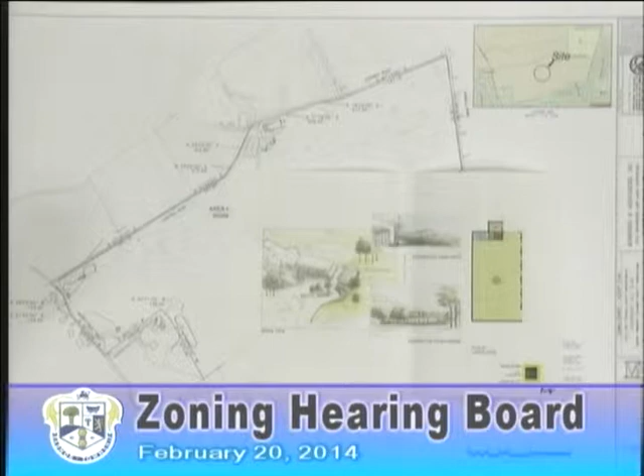David Fiorello. I'm a professional engineer with the firm of Momini Associates in Bryn Mawr.

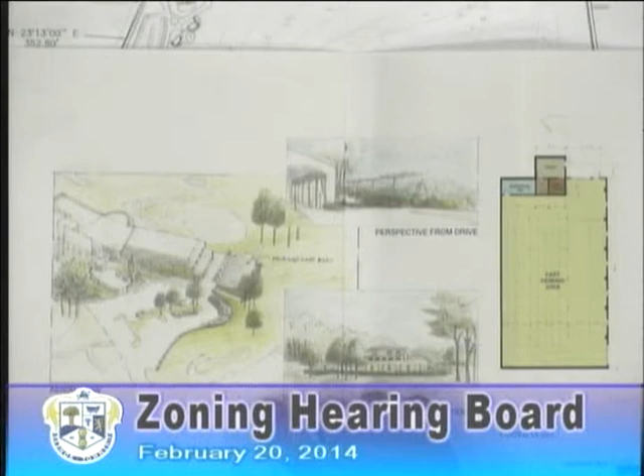You can see, looking at the aerial view to the left here, the existing clubhouse building. There is a driveway in between that serves the current golf cart area. This is where the members come out and pick up their carts. The area where the building is shown is where the current golf cart parking area is.

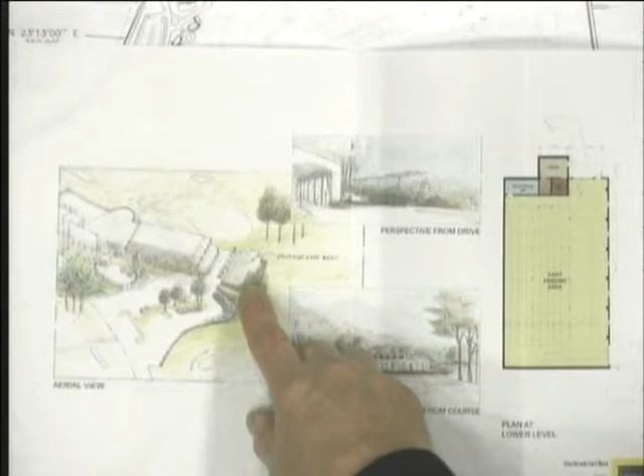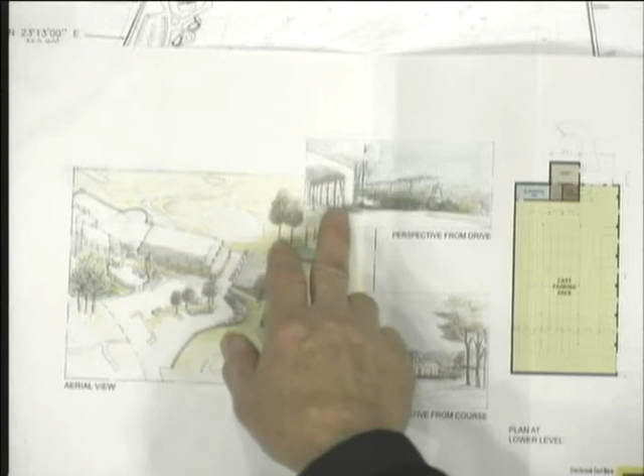The perspective from the course is looking up towards the clubhouse and the building. The perspective from the drive is as someone is coming into the parking lot and looking down, you can see the portion of the clubhouse facilities and the porch on the left and the new building to the right. The building will be lowered into the grade so that passersby will be able to look over the top of the building.

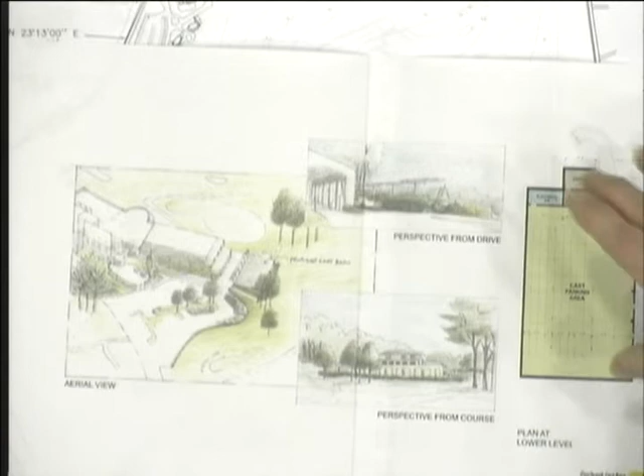The floor plan, as it's shown here, the cart parking area is oriented so that the clubhouse is to the left.

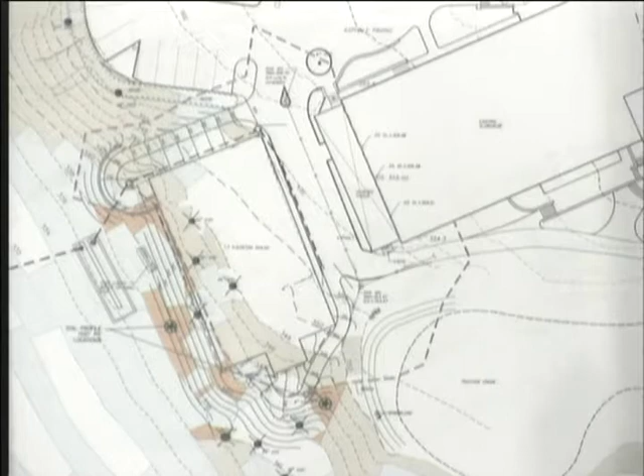I can go to the plan showing the layout, which shows the intent is to have the building oriented this way, so that this ramp coming down will be a ramp leaving the building to bring the golf carts up to this areaway. That is this driveway here.

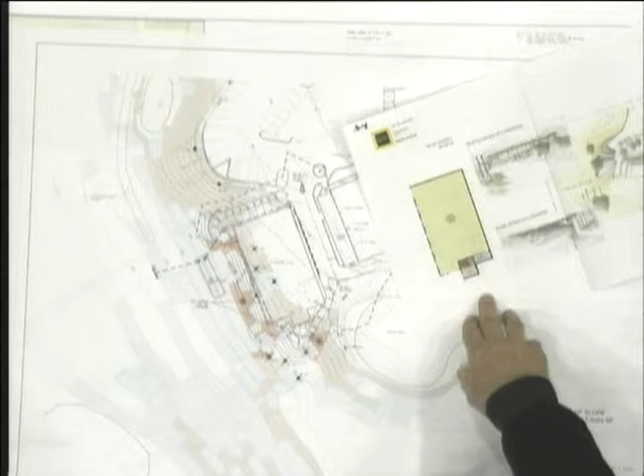There is a ramp that will return the carts back to the building down through here. It goes along the side of the practice green. That is the driveway coming down to this lower portion of the plan, and there's a side door that goes into the building in that respect.

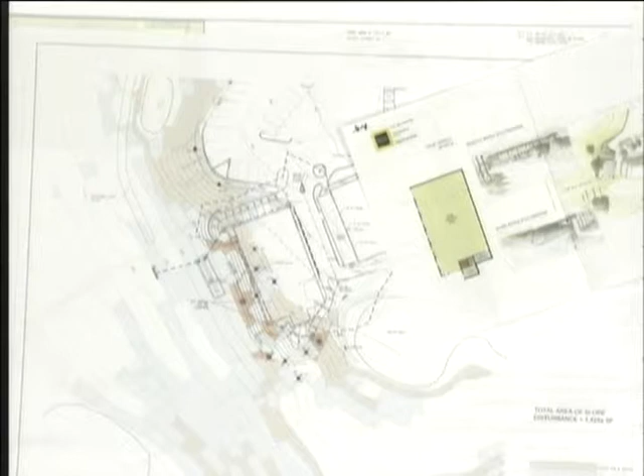Can you please state for the board your occupation? I'm a home builder. And what is your association with the club? I've been a golf member there for 25 years. I've served on the board a couple consecutive terms in the past. I'm currently a member of the Facilities Committee.

We've already touched on this, but can you please describe the proposed project for which we're seeking the zoning relief, and also describe the reason for why we need the building? Okay. When you drive up the driveway to the property, there's a parking lot here, which is to the right of the driveway, before the main clubhouse, which is over here. This is the golf porch and the golf shop where everyone starts their round and everyone finishes.

There's a paved driveway in here which is exclusively for golf carts. This parking lot is for automobiles. This driveway is for golf carts, and this current parking lot is for golf carts. You start your round here, and you finish here. So this is the central starting and stopping point for golfers. As David has already described, the building is set down into the slope where the parking lot is, so that when you're on this porch, you can still look out over the top and see the golf course beyond.

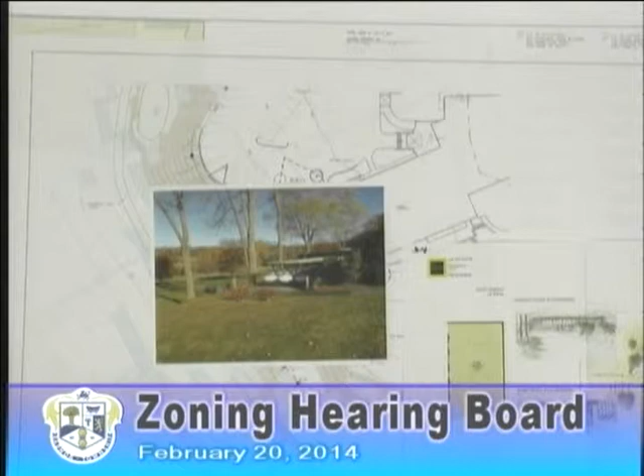And were any other locations considered for this building? Yes, we did look at a couple of remote locations.

Okay, this is Godfrey Road, and here's the main driveway into the club. There's a maintenance building right at the entrance, which is a brick building in the same architectural style as the clubhouse, and there's an employee parking lot here. We looked at that location, but it doesn't make much sense logistically because we start the carts at the golf porch and finish at the golf porch. If we put it down here, we'd be shuttling these things back and forth up and down our driveway all day long.

Another advantage to locating it here is we're putting it in a location that's currently macadam. If we put it down there instead, we're not in a position to remove our employee parking spaces for cars, so we'd have to find a spot where we'd be starting from scratch. Plus, we have close neighbors right across the street, actually two, so that didn't make sense either, but the logistics are the main reason we want it here. It's already shown on the perspective we reviewed with the board, but can you describe the proposed architecture of the storage building? Yes.

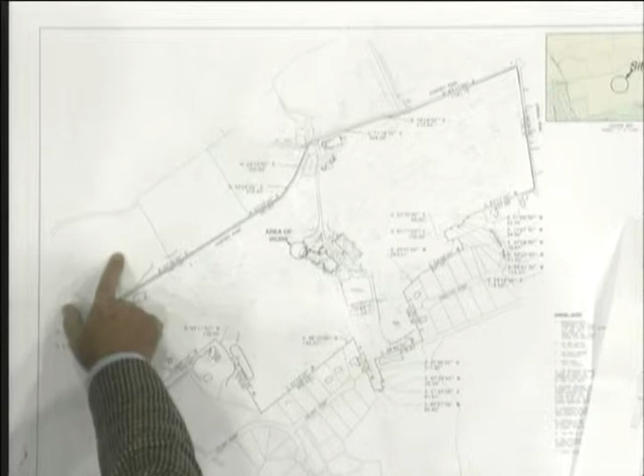There is a house on this property, probably another 400 feet from Godfrey Road, so this building would be visible from that house. Actually, there are a total of 3 houses here, near Godfrey and Darby Paoli Road. There's one house I don't believe would be visible, another on this large Ardrossan lot, and one more on this lot. So there are 2 houses across the street that could visibly see this, but this building is 450 feet from Godfrey Road, plus their setbacks are a couple hundred feet.

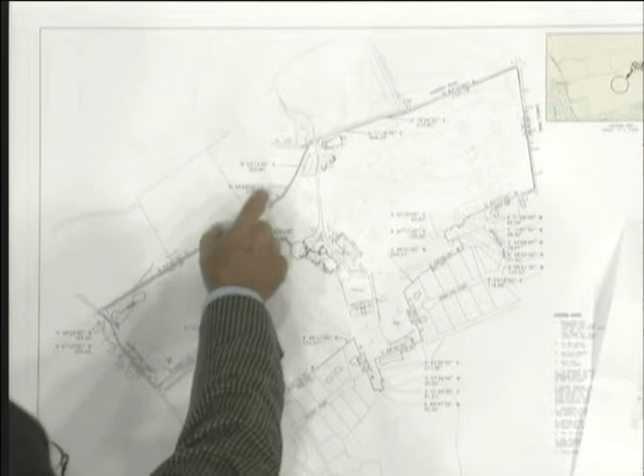Is this building going to be open on the sides, or is it fully enclosed? No, because it's half buried, it's sort of like a subterranean basement bunker. But it looked in the rendering like you could see the sky through the side, so it looks like they were all open.

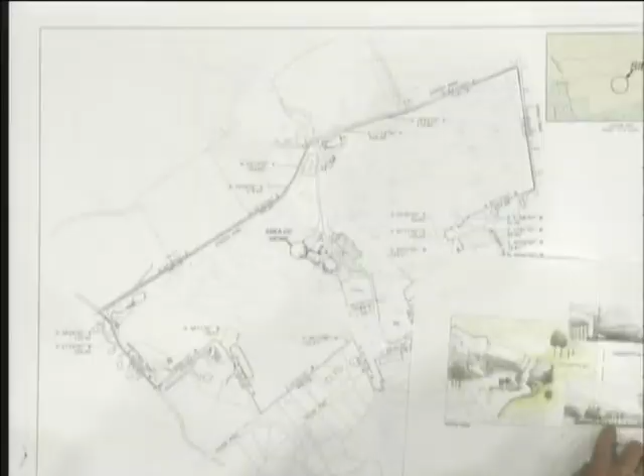Okay, when you look at that upper right-hand area, where I have my fingers, is that what we're looking at here? Or do you mean this? I see what you're doing. Are you referring to this? Yes, in that one there, it looks as though you can see through the blue sky, so it looked like it's an open side.

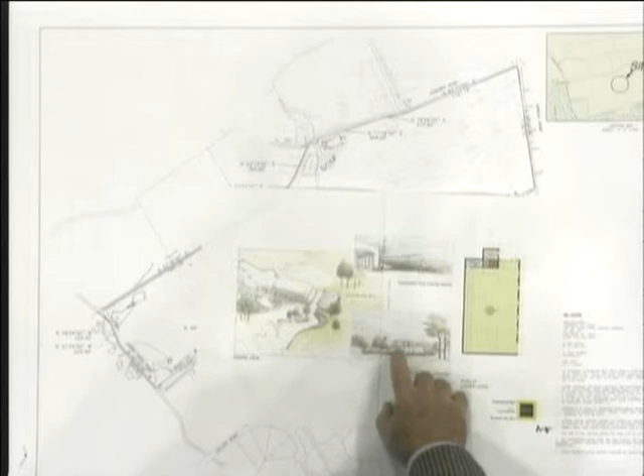Oh, that's the clubhouse beyond, with the dark circles in the middle with the arches. So the roof is kind of the grade? Exactly. The roof is similar to the grade where the golf porch is.

Now, this perspective from the course, that thing there, is that the side of the new building we're seeing with those arches? Yes, that is correct, that's the new building. I see, because presumably the course is all around it, so I didn't know which perspective this was from. That's correct.

Sorry, I'm so thick. What's the structure that's there right now? There is no structure at all, just a paved parking lot, open lot. So the golf carts are visible from those properties? Yes.

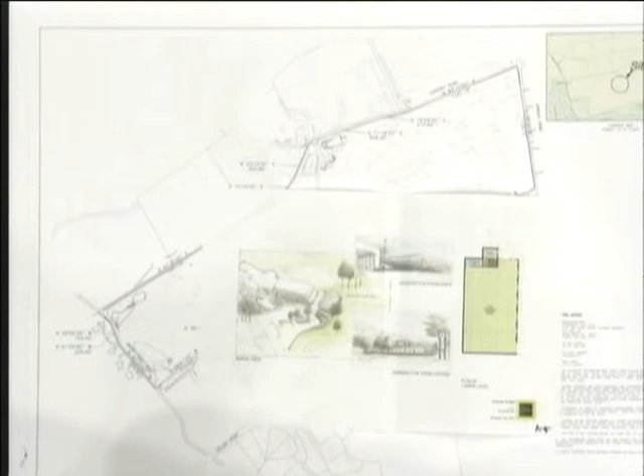This photo will probably help. Flip it around. Okay, so this is a photo from the side showing the golf cart parking lot with the golf carts on it. And here is another perspective showing the golf porch and that cart throughway in front of the porch, with some landscaping that separates that from where the carts are parked.

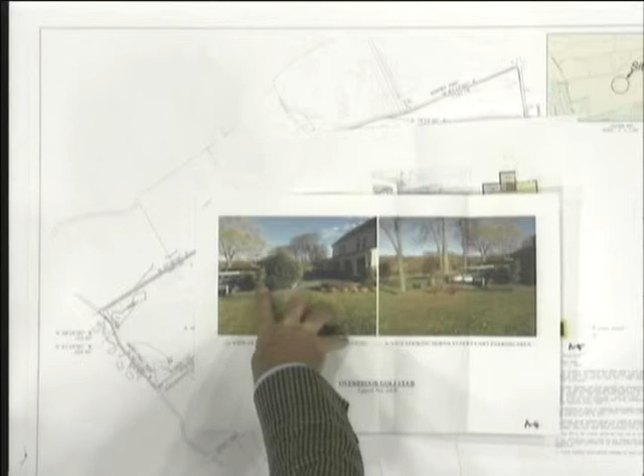And notices went to the people along Godfrey Road about this application, right? Yes, as it should be. Does everybody understand what they're proposing? Okay, might as well proceed.

Okay, our next and last witness is Dave Fiorello.

Can you please state your name and address for the board? David Fiorello, Momini and Associates, 924 County Line Road in Bryn Mawr. And what is your professional experience? I am a 1972 graduate from the Villanova College of Engineering, and I've been practicing civil engineering since that time. And are you familiar with the Overbrook Golf Club property? Yes, I am.

And what plans have you prepared in connection with this project? I have prepared the zoning exhibits that's in front of you now, and I have also prepared land development plans that were submitted to the township as part of a land development process. Okay, and I know we've already gone through it, but can you quickly go through them again and describe any relevant aspects, especially the previously disturbed areas. Well, I think the first sheet gives you an orientation of where the clubhouse sits as part of the course, and as Bernie mentioned before, you can see Godfrey Road along the north, and we are 400-plus feet back behind Godfrey Road.

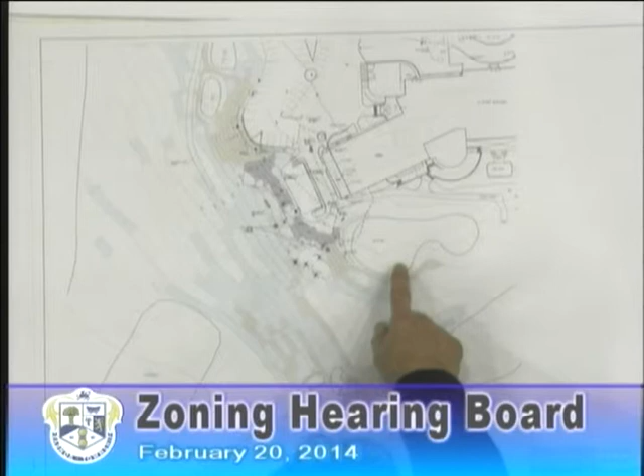The practice green behind the clubhouse has some slopes associated with that, and I think that is a result of grading when that green was created.

We also have some steep slopes adjacent to the parking area that were most likely created when that parking area was constructed, but we don't have plans and information about when that was done, so we're looking at them as slopes that are controlled by your ordinance.

And what you have just explained in terms of other areas outside of the 2004 area that were created as a result of other improvements, that's consistent with what's stated in the Earth Engineering report, correct?

Yes, we had asked Earth Engineering to come out and dig a couple sample holes in those areas, and they're defined on the plans with these stars with circles. It shows the test pits that were dug.

Their report shows that there's roughly 6 feet of what would be described as fill material that was obviously disturbed at one time, and is not natural material, which supports our position that these slopes were man-made.

David, on the A2 chart, the dark purple, that would be the man-made section? Yes, sir. That was within the area of disturbance from the 2004 plan.

That must have been a long time ago. It seems like there's some very mature trees there. There are tree wells that are around there. Some of that work was graded at that time. There were some tree wells, and there was some, shall we say, fine-tuning.

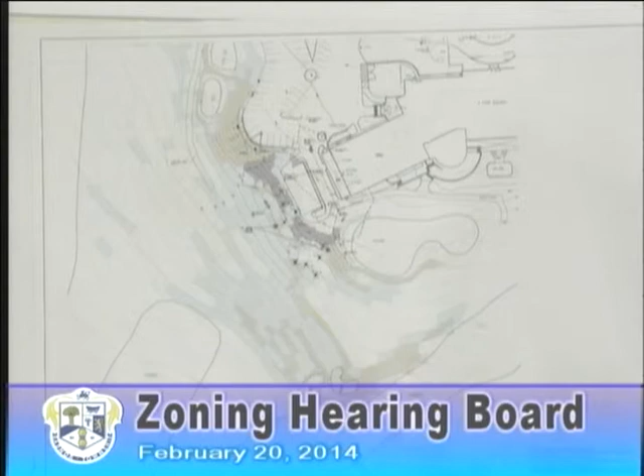I think if you look at the plan, you can see that the area below it were areas of blue, so they're in the 14 to 20% range. Some of the grading that was established in filling this area, certainly there were some tree wells constructed to protect those trees, but they were probably borderline, maybe in the 14 to 20% range at one time, and now they're a little bit steeper.

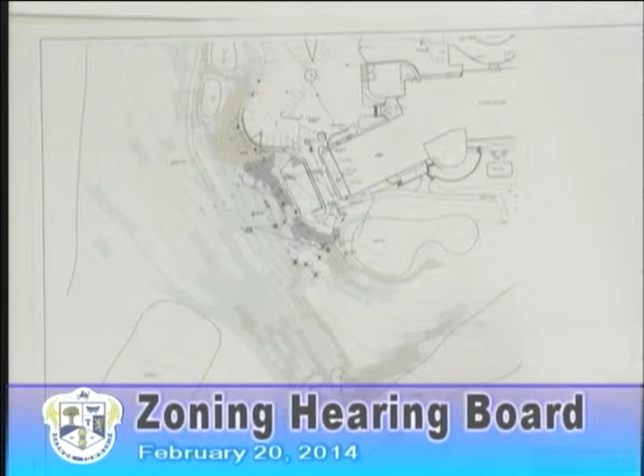And again, you reviewed this plan with the zoning officer as well as the township engineer, correct? Yes, I did. And they have agreed that only those areas outside of the 2004 disturbance areas require a variance. That's my understanding, yes.

Okay, and then if you can just pinpoint for the board again, those, I believe there are 4 areas that amount to 1,425 square feet? Yes, on this third sheet here, again, what I've done is superimposed the new building footprint, and I've also kept on this plan the line in purple, the original limit of disturbance.

We are showing what our grading would be. We have to bring in an access ramp to access the building. The original design for the building wanted this entrance, garage door if you will, on the side, but that was forcing us to push the road or the ramp further closer towards the parking lot, disturbing more slopes, and creating a very steep embankment for that pathway.

So the entrance was relocated to the other side so that we could pull that ramp away from those other steep slopes and still present a safe alternative to bring vehicles in.

We also have the ramp coming that will be- currently, what we would call the north side of the building is used as a pathway into the parking lot, and the southern portion was the pathway out. For safety reasons and because of the slope, we're switching this around so that anybody bringing vehicles out of this north side is going up the steeper embankment instead of the possibility of coming down.